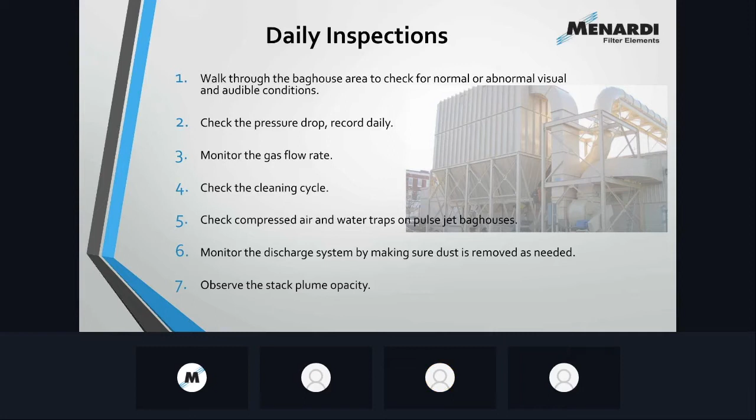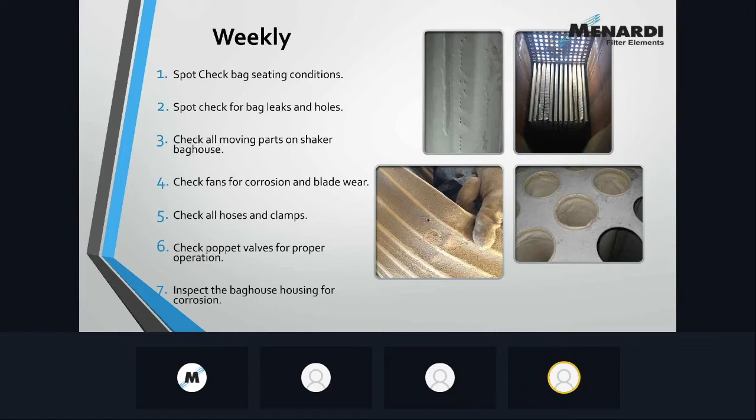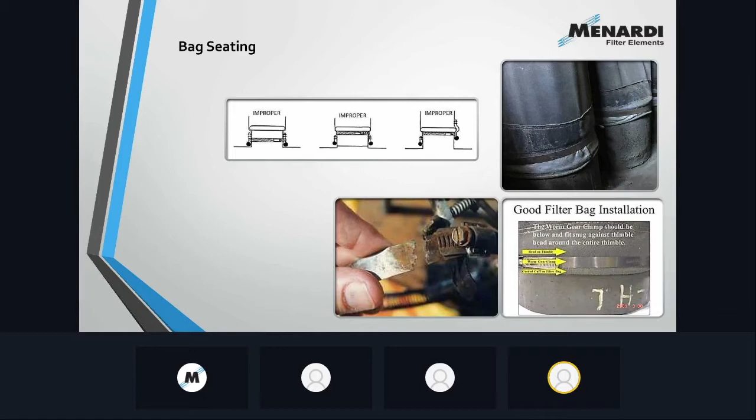Shaker baghouses: you folks out there that have experience with shaker baghouses, they're the oldest type of baghouse out there. There's a lot of mechanical arms, motors, actuators that are moving around. That's what causes these things to clean. And don't just take for granted that because that motor is turning, those shaker bars are moving. Please take an opportunity to look, make sure that everything is lubricated, and even though that motor is turning, make sure that the bars are actually cleaning the bags.

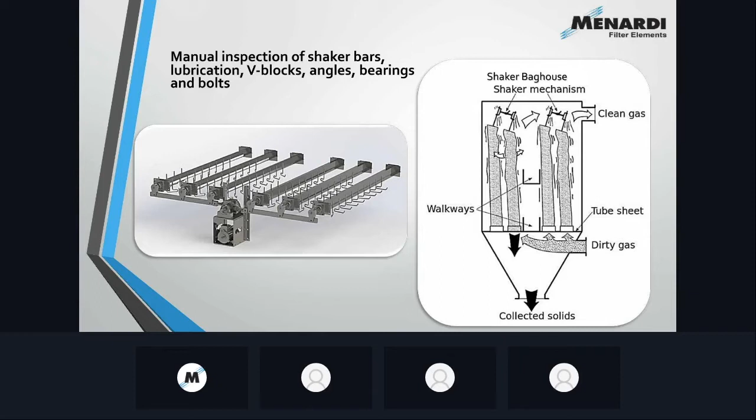We move on to the monthly inspections, and just to build on what Michael was telling you, we want to spot check certain things inside the baghouse, especially in reverse air bags and shakers. You want to check the bag tensioning. You also want to blow out the manometers and the magnehelic lines for your differential pressure gauges so that you get good readings and can rely on the information you're getting from your gauges. You want to verify the working temperatures of the system.

We know that one of the biggest problems with baghouses is that temperature spikes can really chew into the life of a bag, and premature failure can happen if you get temperature spikes often and if they're long in duration. You have to be very careful. So you want to make sure your temperatures are controlled properly. You want to check all your compressed air lines to make sure that you're getting the right amount of air in pulse jet systems, so you can back pulse the systems, and that the air is dry, so you're not creating moisture when you go to back pulse and clean your bags.

You want to check the bag sequencing, and this goes back to the valve actuation and so forth. You want to make sure that you're sequencing in asymmetric order, say row 1 and row 5, row 2 and row 6, row 3 and row 7, and so forth, so that you're never cleaning a row of bags next to a row of bags that were just cleaned, because all you're going to do is refoul those bags, and you're going to have a high differential pressure. You're going to end up with premature bag failure, and your system's not going to work efficiently. You want to make sure that they're sequencing properly, and that you've got the right intensity and duration in your back pulse.

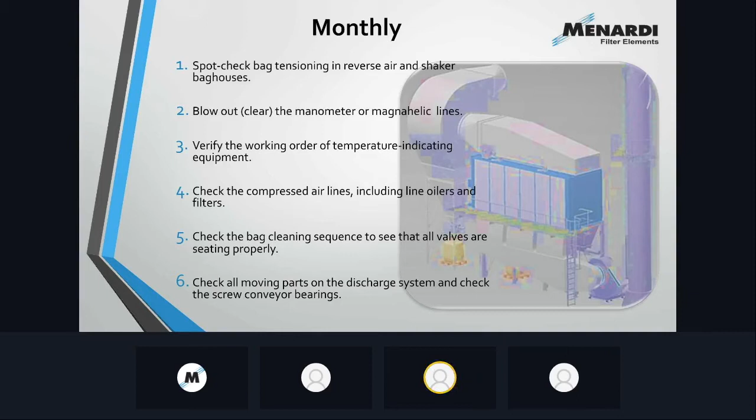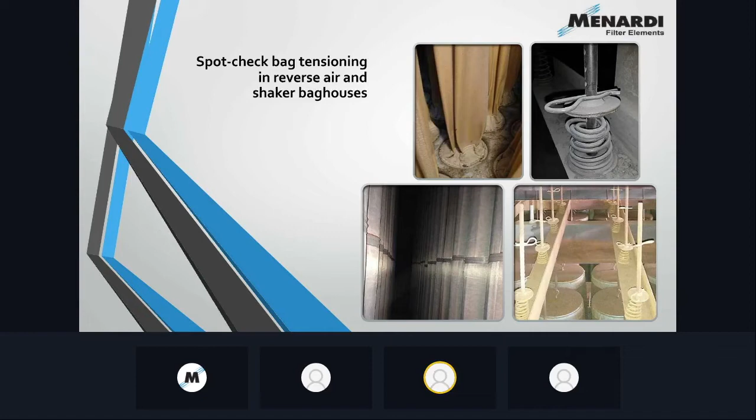One of the things that we recommend, and it might seem like a little bit much, but it really is something that pays off in the end, is that we want to make sure that our differential pressure gauges are working properly. And so what we recommend is that you take a new gauge or a gauge that's been recalibrated out with you when you make your monthly check, and you disconnect the hoses on the baghouse and you run those hoses back to your new differential pressure gauge.

If the reading on the new gauge checks with the reading on the old gauge that's on the housing, then you've probably got a good gauge on the housing. If they don't check, then you've got to look at that differential pressure gauge and possibly replace it or repair it. These are little things, and delta P is a real problem in baghouses.

Any of you guys that are maintaining these things, you know that it can be an issue, and it's never a slow creep. When it's a problem, it happens almost instantaneously, and you end up with catastrophic failure of bags and cages and so forth. So it's real important that you go out and you check your gauges and so forth.

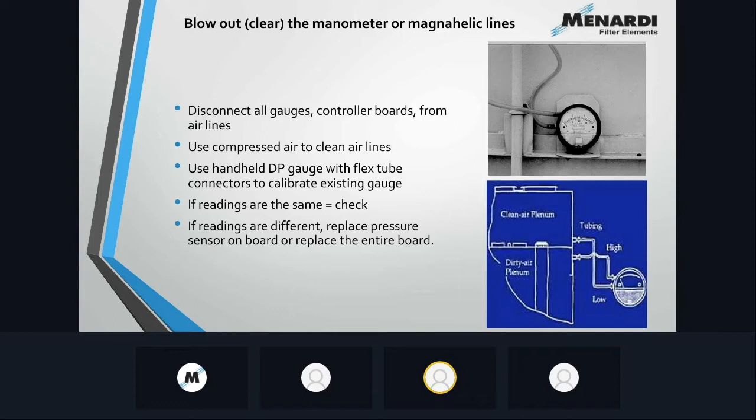Let's talk about making sure your compressed air lines are clear, and your oilers and filters are working properly. We know that plenty of compressed air systems create moisture, and if they don't have a desiccant dryer on them, which we recommend for every system like this, but some don't, you get a buildup of condensate or moisture in the lines. It begins to cause a problem, so you're blowing wet air across your bags, and you're not getting the volume of air that you need. So it's real important to check these lines.

You also want to make sure, again, to check your temperature measuring equipment. Make sure that the readings are valid and that you're not running your bags at a higher temperature than specified.

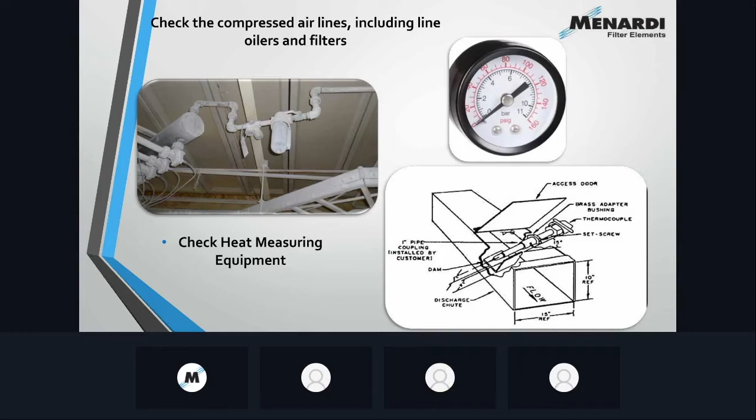For pulse jet cleaning systems, again, the valve, the sequence of the cleaning, the duration, and the intensity of the airflow is all critical. And these valves can be heard as you walk through the plant. You can listen to them firing. You can put your hands on them to check the sequencing, so you can actually feel in your hands how they're operating and what sequence they're firing in.

And then if you've got situations or problems with that system, quite frankly, they're easy to repair. It's just a matter of going out there and making sure that you find any problems that are out there, because they can go undetected. You may hear it from the ground as it fires and it cleans, but you want to make sure that it's doing that in the right order with the right intensity and the right duration.

The blast on a pulse jet bag is a very robust, short blast of air. If you hear the long, drawn out blast of air, that's got maybe high volume but low pressure, there you have an issue. So you want to make sure that these are firing properly. Easy to check.

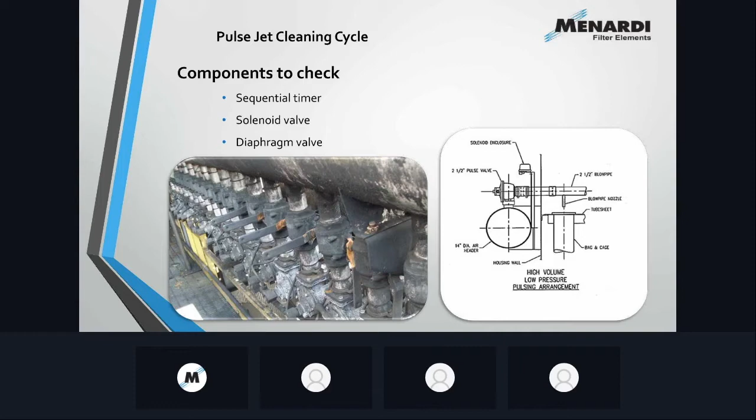Other things that are involved with your cleaning system that could be a cause of a problem or an area that needs to be checked are your timer boards, to make sure that they're functioning properly. A broken or damaged timer board will foul your system and make it so that it doesn't sequence properly. Valves that need new repair kits, diaphragms and springs and so forth can easily be fixed.

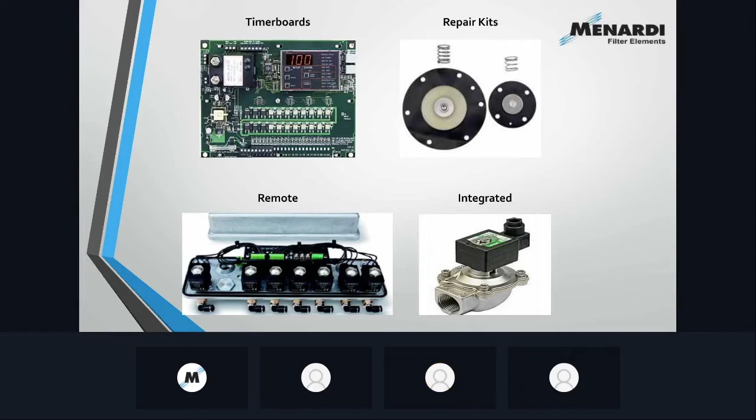Especially for bulk pulse jet housing baghouses, you get into whether you're cleaning on demand or you're cleaning continuously. We recommend for overall life and health of a baghouse that you clean on demand. You only clean when necessary. Again, compressed air is expensive, so we want to make sure that when it's used, it gets to where it's supposed to go and it does its job.

So we want to make sure that you're setting a high and a low differential pressure on your gauges, so that it cleans only on demand through those set points, and that will give your bags the best possible chance of lasting a long time and not failing prematurely.

Over pulsing a bag will do several things. If it's a bag that requires a dust cake, it'll pulse the dust cake right off, and then the bag won't function properly. Over pulsing will also create a lot of friction between the bag and the cage, and it'll wear the bags out prematurely from the inside. So you want to make sure you avoid that.

In systems where you're cleaning on time, you want to make sure that you're not cleaning too often, so that if you have a dust cake, you don't push that dust cake off. So you need to know the type of media that you're using, and then choose the type of cleaning sequence that's going to work best for your system. Again, we do recommend in most cases cleaning on demand.

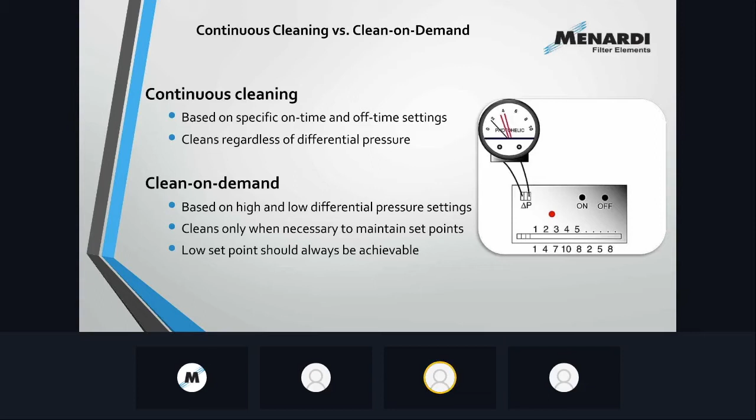Yeah, thanks, Dave. Yep.

From a quarterly standpoint, if your process can allow it, we recommend a thorough inspection of all your bags. So if you can do a leak detect test, this will be a great time to do it. We'll calibrate your opacity monitoring equipment, clean your probes if they need cleaning, and check air in leakage, gaskets, doors, airlocks, screw conveyors, things like that.

We'll spend a little bit of time on this, but most of the time, you guys are going to be working on negative pressure systems. So if you've got a stack with a fan on the back side of a baghouse pulling air through the collector, it's a negative pressure system. In those systems, baghouses are meant to operate under vacuum. So anytime you have air in leakage, depending on where the leakage is, you're either going to be robbing draft, or you're going to be introducing ambient air that's not supposed to be there. All kinds of things. We'll go over that.

We're inspecting the paint on the baghouse, just noting any corrosion, baffle plates for wear, and on reverse air collectors, observing the dampers to make sure that those are seating properly, that those plates haven't worn down, and that you're able to watch your differential pressure. Once those things are in place, you can actually get to a low set point. That's important to make sure that those things are cleaning properly. And then inspecting fans, screw conveyors, airlocks to make sure that those are operating properly.

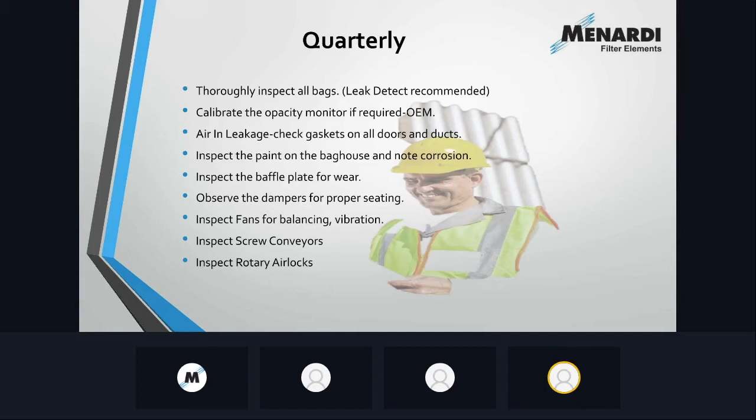The opacity monitoring system. You only really need to calibrate the older units, DC or AC only. If you're using a newer unit from somebody like Auburn FilterSense, those really don't need periodic recalibration. Those are good to go. But depending on the application, how sticky your product is, the velocity, several different factors, from time to time you might need to clean that probe that's in the ductwork measuring the particulate going by. So that's something that we can help you with.

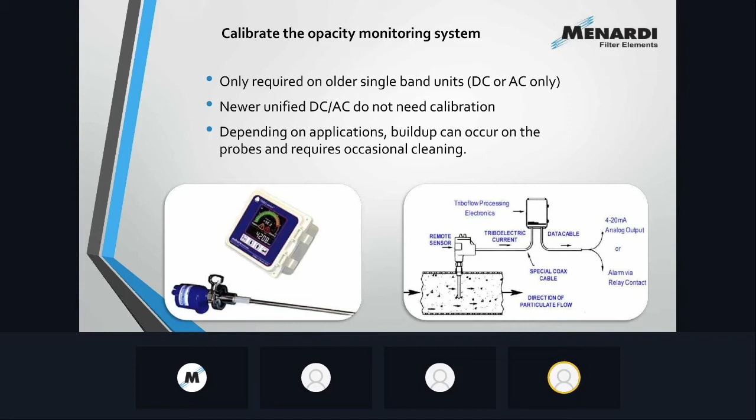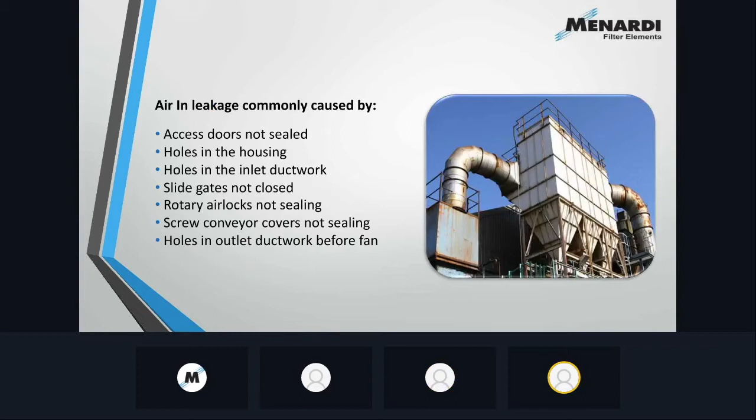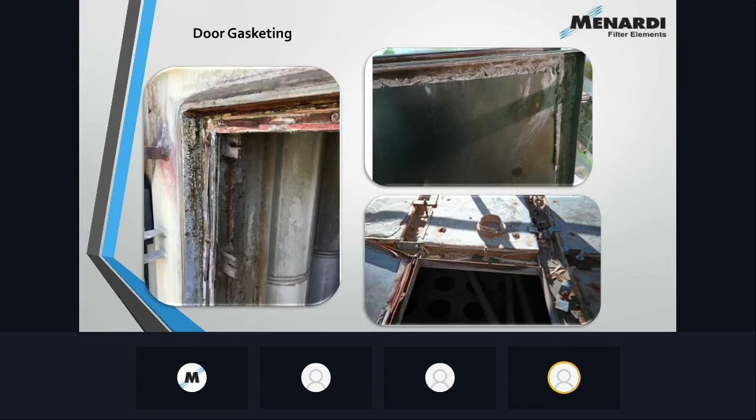These are just some examples of door gasketing. So door gasketing is much like filter bags. There's a different filter bag for every application. There's lots of different door gasketing types. Types dependent on, of course, the door and baghouse seal, whether it's a hatch door or a lift-off door or a lid. And then it's, to a great extent, dependent on temperature and chemistry and how much compression, how much memory you need these things to have.

So door gasketing is one of those things that is easily neglected, forgotten maybe. But if you guys have a couple 100 feet in your storeroom, it does not have a shelf life, just keep it ready to go. Anytime you open the collector to do an inspection, please make this part of your inspection and just have it ready to go.

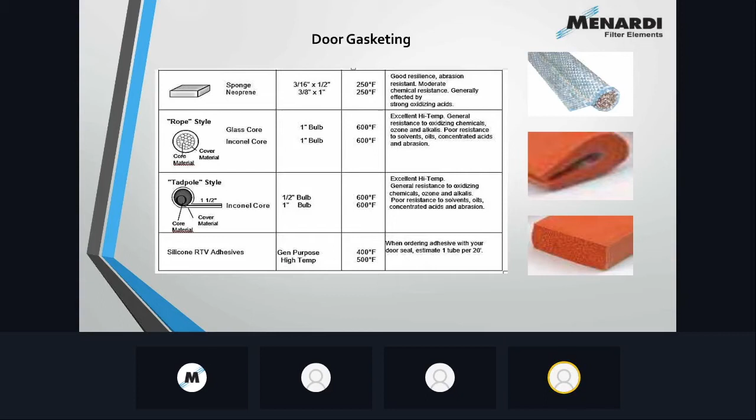So I don't know if you guys can see this screen. On my screen, we should be talking about baghouse. I'm sorry, go ahead. You can't see it, Michael? I cannot, but we should be talking about baghouse inlet challenges.

So baghouses, where your inlet ductwork comes in, bringing your air and gas stream into the collector. Typically there is a diffuser plate there or some angle plate. Sometimes it's perforated holes, sometimes it's concentric rings, turning vanes, all kinds of different things. The point behind this, guys, is these baghouses are engineered from the OEM with these diffuser plates in mind. These diffuser plates serve a solid purpose for these baghouses.

It helps to orient both the air and the particulate evenly throughout the baghouse, so that one section of the baghouse or one section of the bags is not constantly getting pounded by most or all of the gas stream. Okay, so if you were in the inlet ductwork looking out, you should see something, whether it's a perforated plate, or some angle plate there to help redirect the airflow.

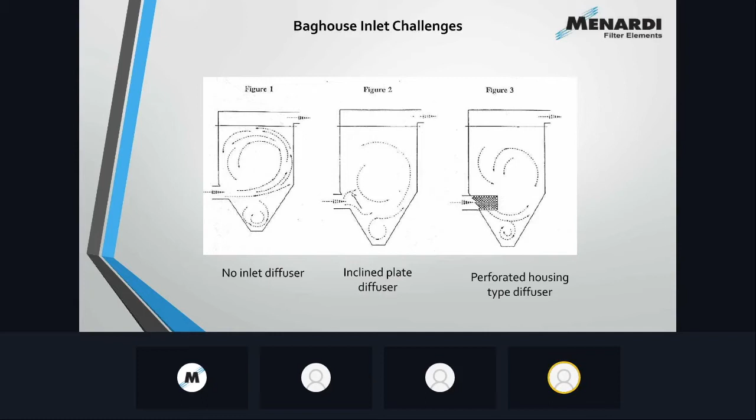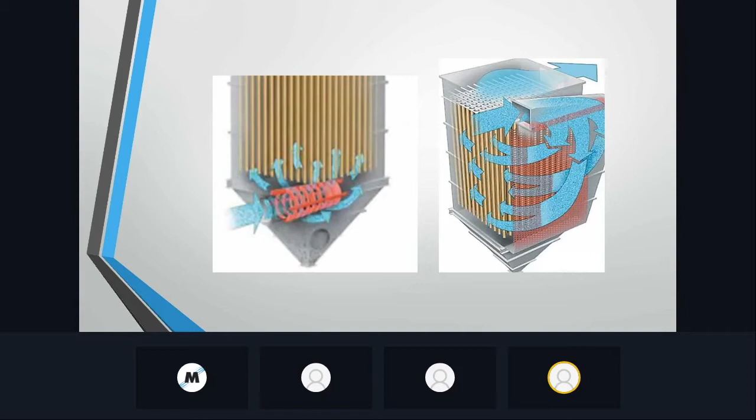So upon inspection, if you go into a baghouse and you see where your deflector plate is wearing and it may cause problems down the road, you want to look at getting someone in there to fix that. Deflector plates, our sister company Micropul, they can go in the baghouse and change the diffuser plates or deflector plates to better suit the application. You know, these are engineered when a system is put in new.

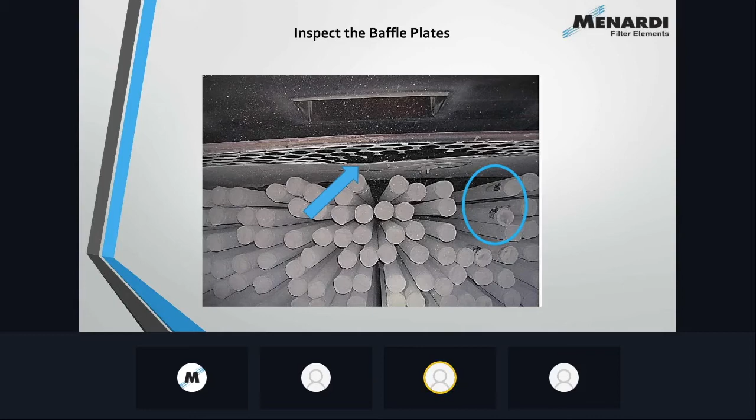One of the areas Michael touched on before was rotary airlocks leaking. We see this often. The rotary airlock is an integral part of the system and is critical to moving the particulate away from the system once it's been cleaned and backpulsed or moved off the bags, and it's deposited into the hopper. If these leak, then you will get air coming in from the backside, and you'll foul the backside of the system, and you can bring moisture in and so forth.

But if these aren't working properly, if they're not properly maintained and oiled, and the bearings aren't working properly or worn out, you'll have a system that won't move material out in an efficient manner. And one of the biggest problems we see in baghouse operation is that you can't get the solids out of the baghouse fast enough. There always seems to be a hang up, whether it's the rotary airlock or the screw conveyor or whatever it may be, or just bridging of material inside of a hopper.

So important to note. And although Menardi does not make rotary airlocks, we can help you get people that can repair these things. You can bring in your OEM to look at them, but we do know that they are an integral part of the system. If they don't work right, your bags have less of a chance of working for as long as you want them to work, and to be efficient for as long as you want them to be efficient.

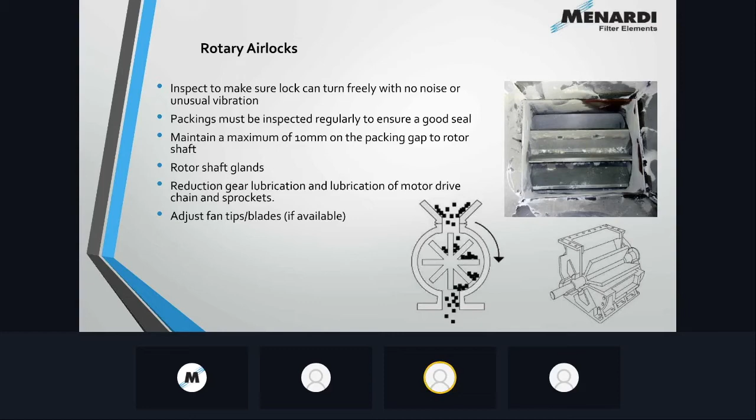Get into the actual moving of the material outside the rotary airlock to the screw conveyor, the drag chain, or the air slide type system. Again, an integral part of the system. If you cannot remove the particulate from the hopper after it's been cleaned and taken out of the gas stream, then your system's not working properly. It's becoming inefficient. You're working against yourself. So a good inspection of these areas is important. If you see leakage around them, if you see solids pouring out onto the ground around them, you know that there's a problem. Something to be real careful about, and to be sure that you check on a regular basis.

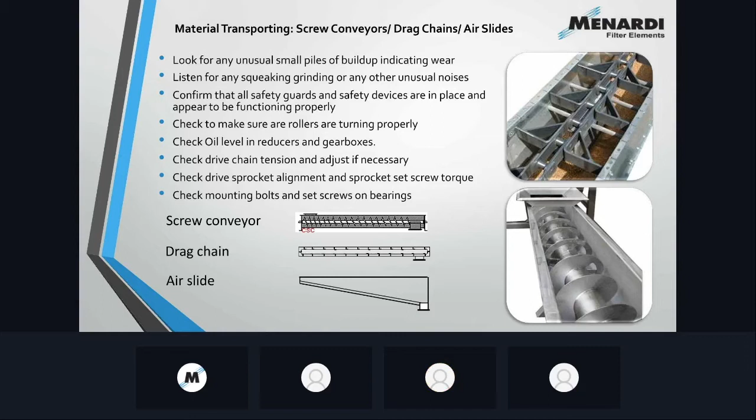The fans in the system, typically, as Michael said, these are negative pressure systems where they're pulling the air through the system. If your fan's not operating the way it should operate, if you've got bent fan blades, rusted internal components and so forth, seal rings aren't working right, you're going to have a system that's inefficient. If you can't push the volume of air through the baghouse at the rate that you need, you're not going to get real good deposition of the particulate on the bags, and you're not going to have the proper can velocity or interstitial velocity to move the stuff off the bag once it's been back pulsed. So it's important that your fans operate efficiently and at the rate that they were designed to operate at. Real important.

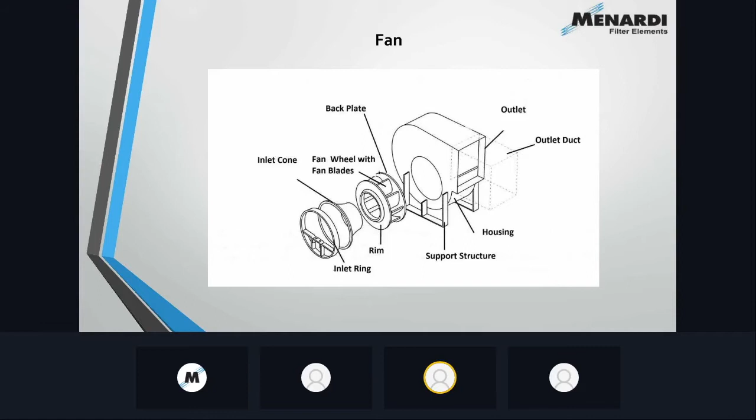Troubleshooting your fan. So you want to check the mechanical condition of the fan. This is a good point to make. Drive belts that are loose or out of alignment can result in as much as a 20% decrease in fan speed. That 20% decrease in fan speed can directly be related right back to the efficiency of the system. And if you're not getting what you need as far as the flow rate at the inlet and air moving through the system, it's not going to clean properly. It's not going to deposit particulate properly, and it's going to be very inefficient and cost you money. So you want to make sure you do a thorough inspection of your fans on a regular basis; they're kind of the lifeblood of the system. If your fans aren't working properly, your system's not working properly.

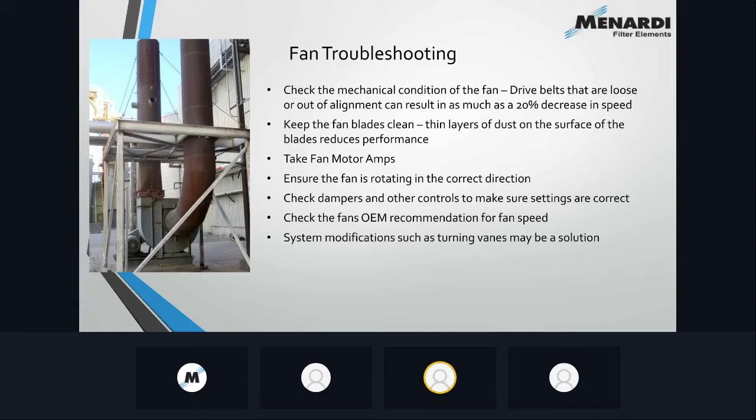Michael, I'll pass it on to you.

Okay, thank you. And I know it's a lot of information, guys. We will have a summary recap at the end. But like Dave started the presentation, the further you get into the inspections, the longer, the more thorough the inspections become. So on an annual basis, we're just checking bolts, structures, welds, ductwork, buildup, blowpipes, hopper wear, things like that. Your high wear parts on cleaning systems, acoustics, sonic horns, hopper level probes, and we'll talk some about your bottom load collectors that could use an inspection at least once a year.

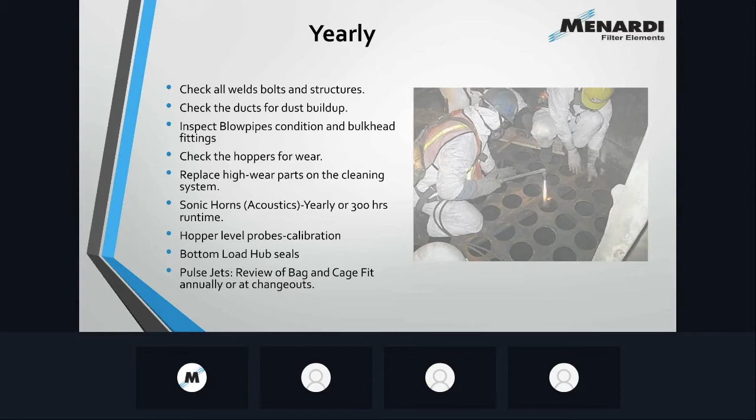Tube sheet cracks. These can be kind of difficult to find sometimes. They can lead to a lot of problems, what we call backside blinding or failed emissions, things like that. We had a customer not too long ago whose standard operating procedure was to just change out the bags once a month. The reason behind this was believed to be their process. Leak detect test indicated nothing going through the bags, no holes in the bags, but it was just believed that it was a problem inherent in this process and in this collector. So that was a lot of money every month to be turning over in bags.

So we agreed to come in and do an inspection. Tube sheet cracks sometimes can be very small, so it does take a thorough inspection. An annual inspection is a great time to do this to really get the tube sheet cleaned, swept, even washed sometimes. A half a day inspection on the tube sheet revealed a couple of cracks in the tube sheet that were welded up, and the bag life in that collector went from 30 days to over a year. So the benefit for you guys, once you nail down where those cracks are and repair them, less downtime, less maintenance, longer bag life.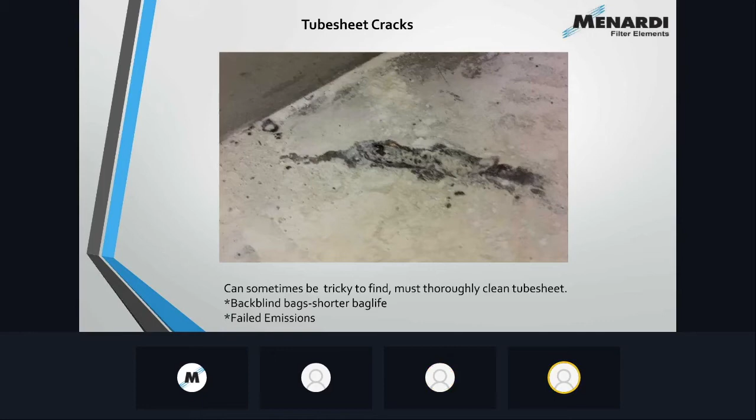As far as welds and joints, we're just looking for anything that is obviously corroding, anything that seems to be thinning out, any new shiny spots in a hopper or again at the baffle plates, anything like that.

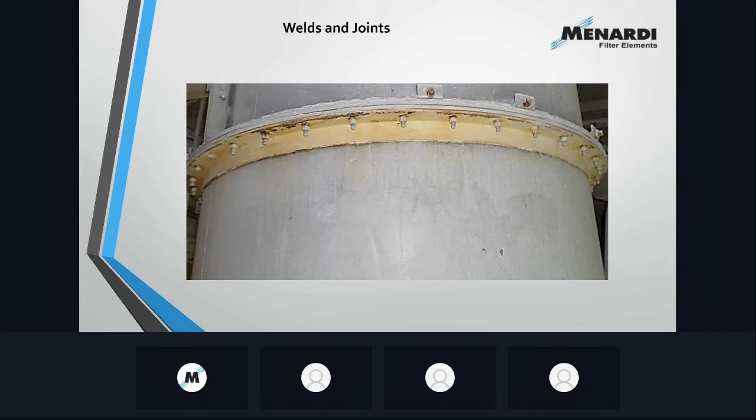Ductwork buildup. Common issue here. I've got a 50 horsepower fan pulling 4 pickup points to my dust collector. Boss comes in and says, we want to add a new line, or we want to add a new process. My differential pressure is running at 2 inches of water column. So I must have plenty of room in the baghouse. Let's add some pickup points. So we change the 50 horsepower fan out to a 100 horsepower fan and add 4 new pickup points.

Your ductwork is sized to carry a certain amount of velocity, a certain amount of grains of particulate, and all that is meant to impact the bags at a certain ratio. And that's all things that we can help you calculate. But every time you have some buildup in the ductwork, it's just like putting your thumb over your water hose. It increases the velocity of the remaining volume that's going through there. So just be very careful when we're adding pickup points. Make sure you get that engineered correctly.

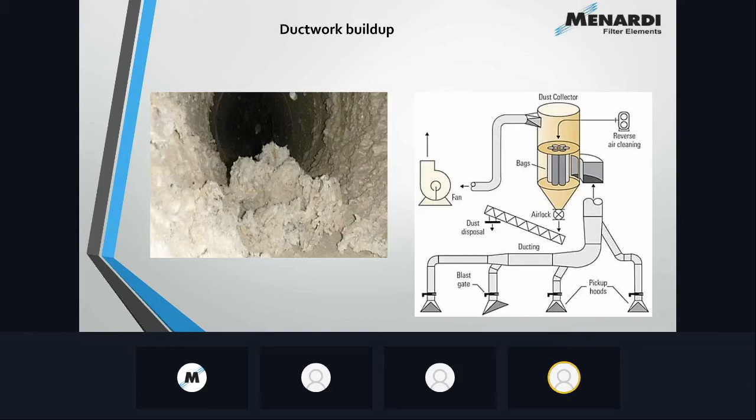These are just some air velocity rules of thumb, again speaking specifically on ductwork and carrying velocity. Again, rules of thumb. It's going to be different depending on your gas stream composition, how much moisture you got in there. Is your particulate sticky? Is it typically dry? But just know that ductwork and that baghouse is designed specifically for your system. So anything lower than design could have material drop out and lay up in your ductwork. Anything higher will cause abrasion and premature wear on all kinds of components in the baghouse.

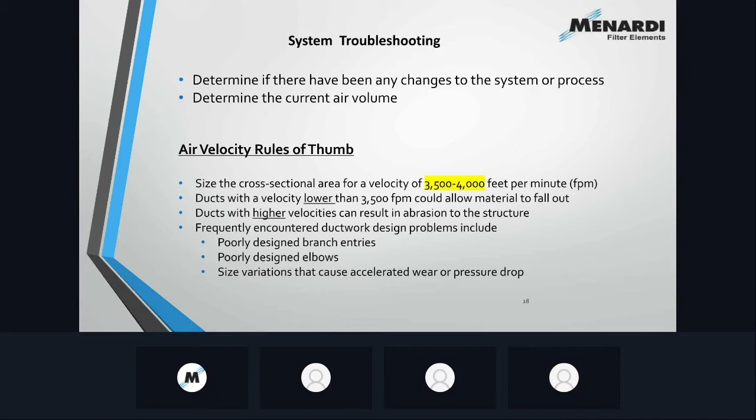Blowpipes. Dave touched earlier on the cleaning system, how to check your timer boards, solenoid valves, diaphragm valves, all that good stuff. So at an annual inspection or anytime you change out your bags, if you change out your bags more frequently than once a year, take a few minutes to look at the blowpipes.

You should have a blowpipe over every row of filter bags in a pulse jet collector. There are certain types of pulse jet collectors that don't have that, but in a typical high pressure system, you'll have a blowpipe centered over each row of bags. The holes, although they look like just a simple hole drilled into a piece of pipe, do have a reason for being a perfect circle.

Anything that's causing an elliptical pattern or any kind of a star pattern, you see the picture there in the middle, that's actually a slotted blowpipe, will cause all that energy that your header system, your timer board, your solenoids, your diaphragm valves, all that is working to push air and cleaning energy down into your bags will get wasted if the blowpipes have misformed holes over the top of the bags.

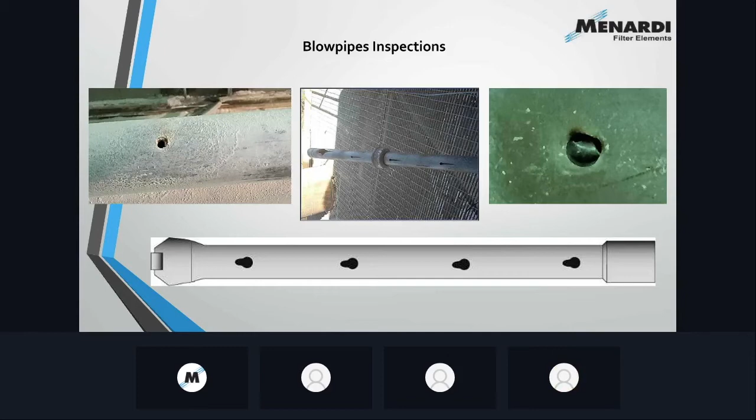So here's a good picture of that. If you've had to replace your blowpipes, again, please make sure that the center line of that hole in the blowpipe is over the center line of the bag and cage installation. The picture there is what can happen to an aluminum Venturi, a metal Venturi, where a blowpipe is not directing all that cleaning energy straight down into the bag.

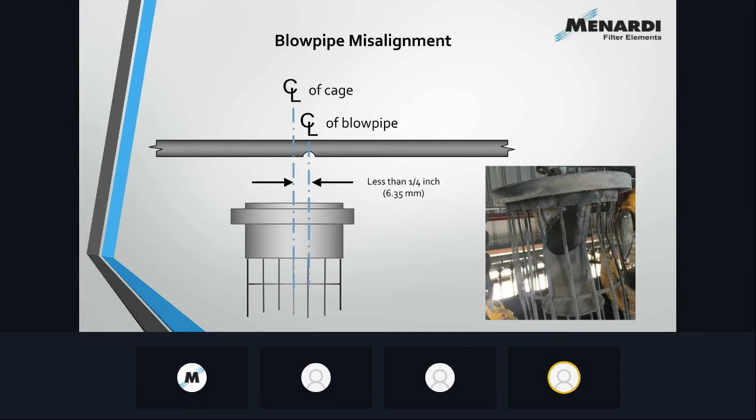If those blowpipes are slotted or again starred or elliptical, anything like that, instead of the air and the energy coming out and going straight down the bag, it might go sideways. So if air and dust particulate can sandblast a hole into a metal Venturi, you know what it can do to a filter bag. So again, just at least once a year, let's take a look at your blowpipes.

Blowpipe connections, there's really a couple of different really common sizes out there. This is a good thing while you're doing your inspection to make sure that the holes in the blowpipes are correct. These end nuts don't typically get fouled unless they get cross-threaded or something like that. But your nitrile gaskets and those retainer rings, sometimes those get lost.

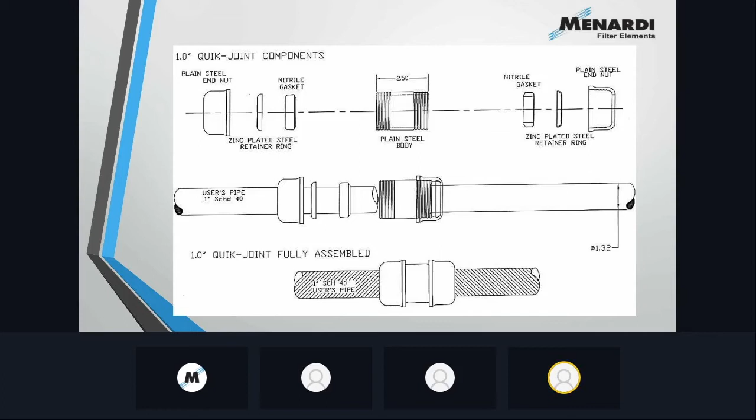Okay, we're going to move on to sonic horns here, and for those of you who may have systems or processes that have some particulate that agglomerates or clings to the sidewalls of your hoppers, you may use sonic horns. And if you don't, and you still have that problem, you may want to use sonic horns. And they're a really useful add-on

to your baghouse hopper and your system, because what they do is they help to move that hard to move material out of your system through an ultrasonic sound wave that creates vibration that will help to free any material that's hanging up and move it out of the system. Again, systems that have debris that hangs up in the hopper tend to be problematic, and so you want to move that out. The sonic horn is a real good option for doing that.

They work off compressed air. So again, you want to make sure you've got good compressed air to run these things, and you want to make sure they run for the correct duration and at the right intensity. Just like if you're blowing down a bag, you don't want them to run forever. They usually run for short intervals and are shut off. They're set on timers, and they work to keep the baghouse clean and the hopper clean.

What can be a problem though is they can fail, and even a failed or a broken sonic horn will make noise. So you may walk past it and hear it during your weekly or daily inspection. You say, oh boy, the sonic horn's going off. I hear it. Well, it doesn't mean it's necessarily doing anything. So if you've got one that's worn out, you've got to make sure you get it repaired.

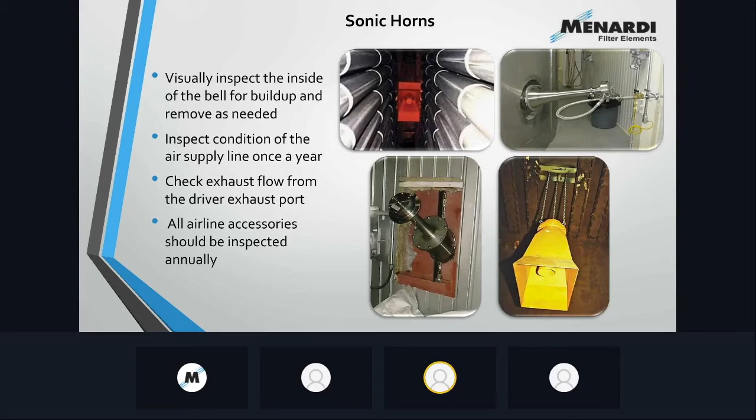And what we're going to show you here is that typically there's very few parts in them. And because of the high frequency vibration you get with these, you begin to wear out parts through vibration. So those worn parts, once you cause a crack, it fails. The sonic horn will still make noise and will sound like it's working, but it's not doing its job. So you've got to make sure that you get in there and inspect that. And if it's broken, get it repaired.

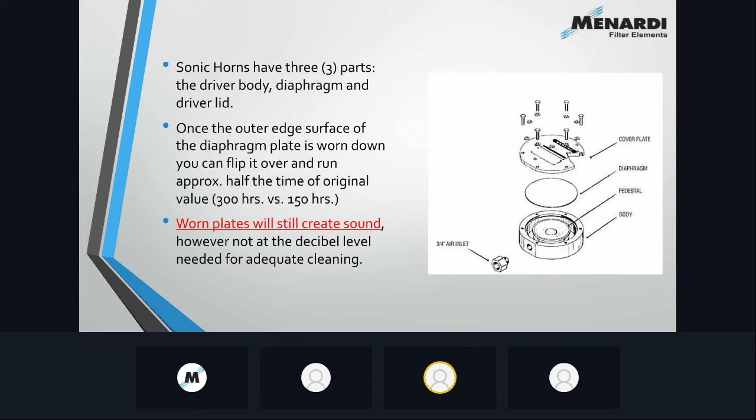They can be repaired and they can be tuned if they're not doing the job you want them to do, or if you want them to do something different, they can be tuned. And we work with a sonic horn company that does that kind of work.

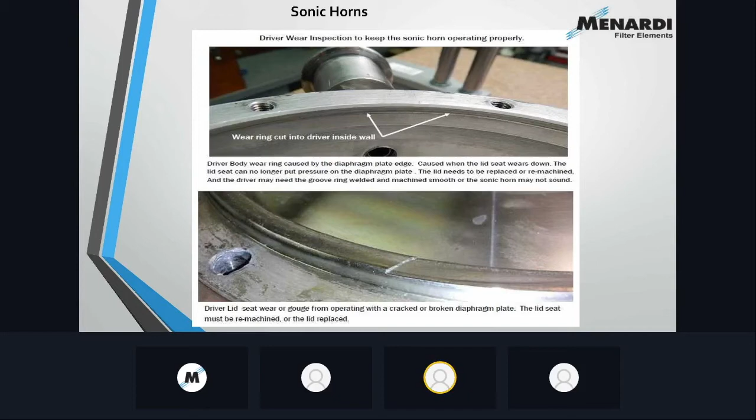So they're a real beneficial add-on if they're used properly, and if they're not functioning, they're just dragging your system down because it's costing you air to run that thing and it's not doing anything. So you want to make sure you make the best use of your compressed air and keep the system as economical as possible.

Another good add-on in your system would be hopper monitoring. In your baghouse you want to make sure that you don't get an overaccumulation of debris in the bottom. These types of monitoring systems help to indicate where you've got a hopper that's holding too much in the way of solids. And hoppers are not holding tanks; they're there to hold the material briefly and feed it down to the rotary airlock, and then further down out to the screw conveyor or whatever the means of conveyance is for the material. These will indicate if you're getting too much debris in your hopper.

Well, we've had plenty of cases, especially on long bag technology, where bags are sitting 6 feet in ash and not being moved out, and you foul the bottom of the bag, you can burn them, you can have hopper fire. So these help you to prevent having those types of problems. They're an inexpensive add-on, and they work quite well, and you can even monitor these through radio frequency through your cell phone and so forth. So these are a nice add-on, and they're not extremely expensive.

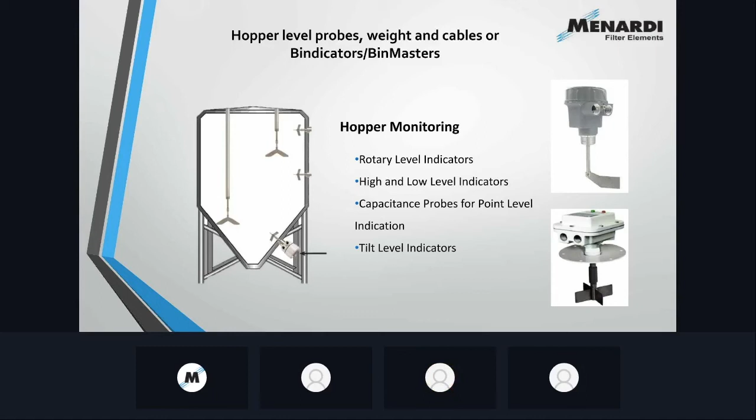Another area of concern during your inspections is bottom load collectors and hub seals. We see plenty of times you go to the baghouse and the hub seals are laying in the top of the clean plenum. They've not been put on properly. They've been misplaced, so they install it without it, and you're going to get leakage. This is a main problem with this kind of a system. So you want to make sure that you do in fact install the hub seals, and that you seal your system properly, just as if you would a top load system, to make sure it's sealed properly in the tube sheet. So it's an area of concern that sometimes gets overlooked.

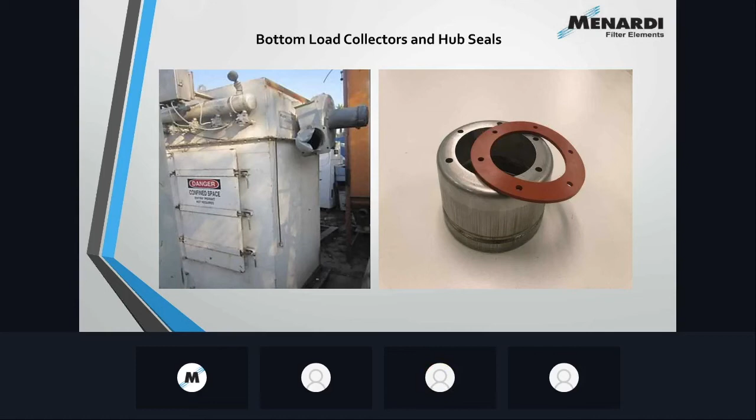One critical area that we look at when we put together bags and cages is how that bag fits on the cage, and it is very important to make sure that the bag is sized properly so that you've got the right amount of pinch on that bag. That pinch allows for the bag to move properly on the cage and to not create excessive wear on the bag over time. So if a bag is too tight on the cage, when the bag is back pulsed, the vibration in the cage wires will rub against the bag, and it'll create a condition where you wear the bag out from the inside.

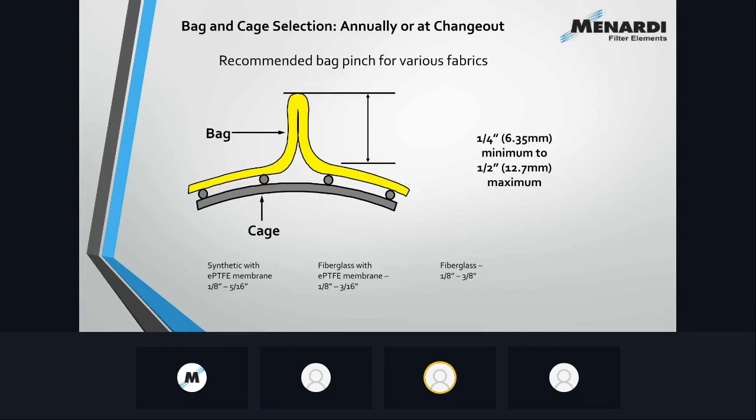If the pinch is too big, then you won't get enough interaction between the cage and the bag. When that blast of air comes through, it's really just a primer to get the rest of that bag and cage moving, so that it can help aid in knocking the dust off the bag. Really important part. We give some rules of thumb there at the bottom on the different types of bags and what we believe the pinch should be, and we find these sizes to be really effective at having an efficiently working bag system. That pinch is really critical, and it varies depending on the type of material that you're using. But the relationship between the bag and the cage is critical, and it's something that we look at first, typically in most new applications or even old applications.

Remember, it takes one bag to foul a system, one bag to have a hole worn into it, whether it's from the inside out or the outside in, to introduce dirt to the clean side of the plenum and to push that dirt down to each pulsation and cleaning cycle. That will cause premature failure of the entire system.

So be real close and look closely at the cages for bent wires, broken wires, rust, corrosion, things that are going to cause premature failure in your bag. Real important. It's a simple thing. You've got the cage in your hand, you've got the bag in your hand. Look at the two of them together. If that cage is suspect, replace it.

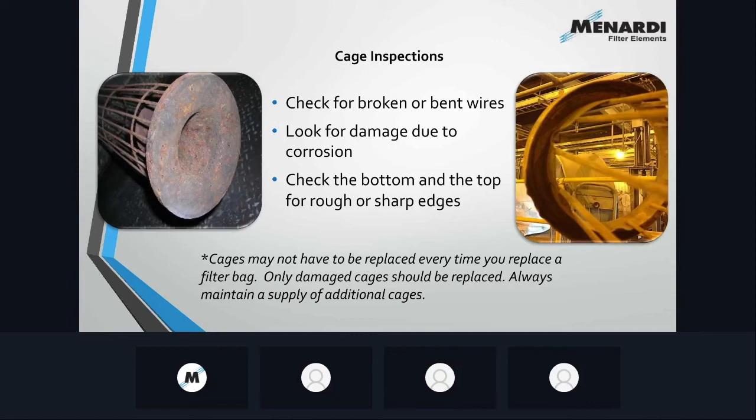Michael? Yeah, thanks for hanging in there with everybody.

Record keeping, everybody's favorite part, right? Look, all the checks, the monthly, the quarterly, daily, what have you. You just need to have an organized, systematic way to measure that. So we're going to go over a couple of things that we use that might help you. The baghouse inspection report used to help create a data sheet, and that'll be specific to the type of collector or the type of data that you're trying to acquire, and then failed bag charts.

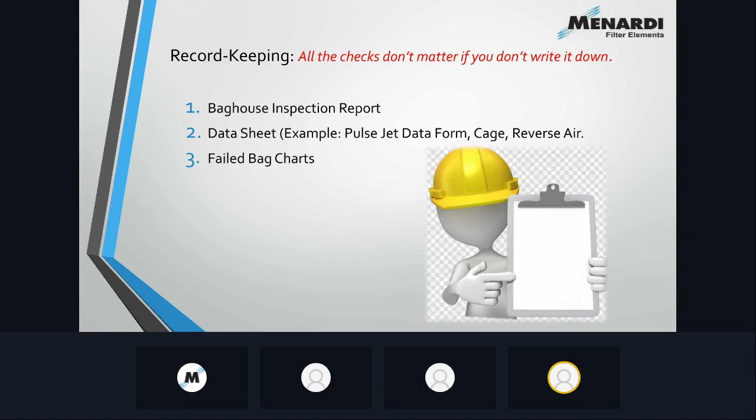So this is a couple of pages of an inspection report that our field engineers and our regional salesmen use when they come out and look at your baghouses. We're looking to capture your baghouse identification, the OEM of the collector, what type of baghouse it is, pulse jet, shaker, whatever, and then all of the information that we've been talking about. What's the size of the bags and the cages? What's the diaphragm valve? What's the timer board? What's the door gasketing? Things like that.

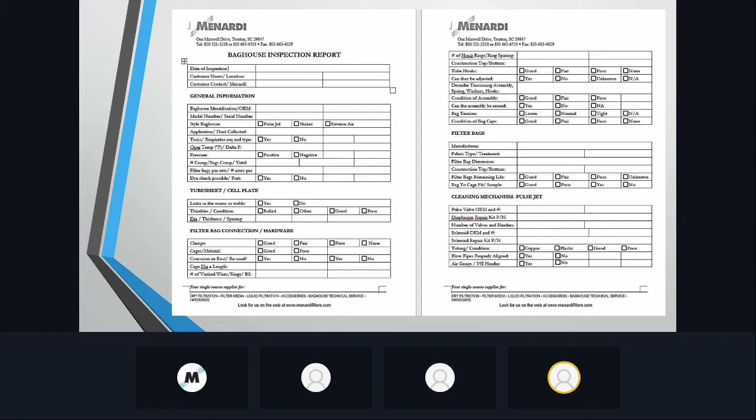So from this inspection report, we hope to condense that down to a data form. So you guys in your plants, whether you have one baghouse or you're a cement plant that has 100 baghouses, you have an engineering library somewhere. If you have one baghouse, you've got a 3-ring binder somewhere with 60 pages of baghouse data. You have 100 baghouses, you've got 100 of those. So you can get your recommended replacement parts from these binders, recommended airflows, so on and so forth. But you're going to be digging through all of those binders.

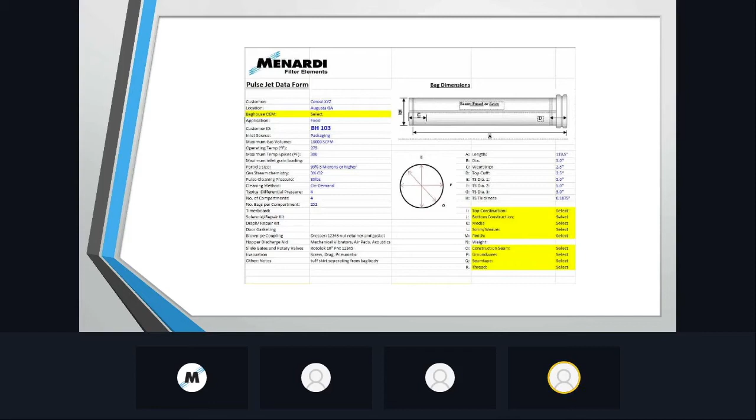What we recommend is creating either a single binder with a data form for each collector or each product, or an Excel spreadsheet with a tab for each. So we're hoping to condense all the information off that baghouse inspection report onto one simple sheet with all the pertinent information on types of bags, types of door gasketing, all that stuff. So it almost becomes a recommended replacement parts list by part number. This condenses things for everybody.

Failed bag charts. You guys are going to run into failed bags. Bags are ultimately meant to fall apart. We just want to get them from new to falling apart and extend that life as long as possible. Not enough people use failed bag charts, I believe. You go into a pulse jet unit that has multiple compartments or one compartment. You want to orient your failed bag chart with where your door is located, where your catwalks are, and so forth. And there's different rules of thumb for where you orient the seams once you install your bags. So in pulse jets, the theory will be that you need to orient them this way. In shaker and reverse air, you need to orient the seams maybe another way.

The point behind that and how it relates to these failed bag charts: these bag charts give you a North Star. For any of you guys that remember looking at a paper map before GPS and computers, north was always up on your map. So on a failed bag chart, you want your seam orientation to always be the North Star on your map. So what does that mean?

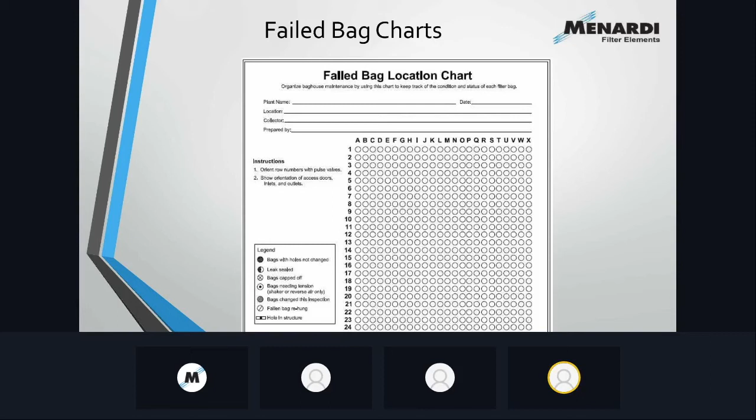On a pulse jet, let's say you have a failed bag at column D, row 2. If all of your seams are pointed in the same direction and you have a failure at the 3 o'clock position in that row, what's your next bag to inspect? It's the bag next to it at the 9 o'clock position. It may not have a hole yet, but that's the next best place to look. Your hole at the 3 o'clock position is pulling in a disproportionate amount of air, velocity, particulate that may begin to sandblast the 9 o'clock position of the other bag. So again, these failed bag charts are meant to help you get in and out of a collector as quick as possible.